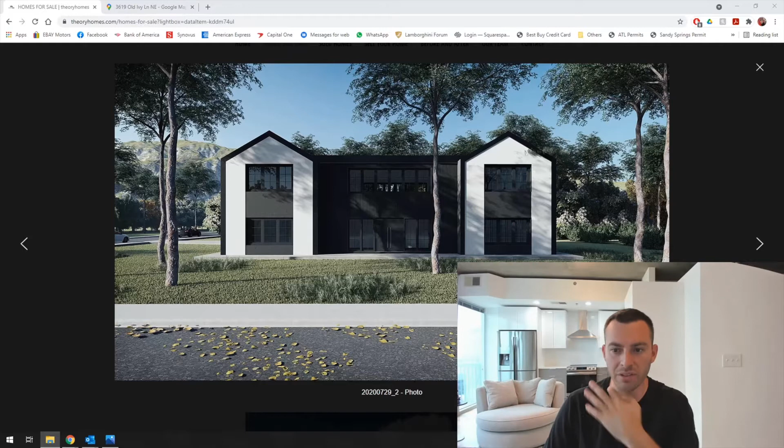So I didn't want it to be so pointy and peaky - I wanted to bring it down. We also have a height restriction on this property; it's part of an overlay called the Meadowcliff RIAD. You're only allowed to build 28 feet tall from the first floor finished elevation, the FFE, whereas everywhere else you're allowed to build 35 feet. So we had to bring it down shorter, and we had to play with the ceiling heights and overall height of the roofs. It's a bit of a challenge when you're doing a peaked roof house, but this is what we came up with. My designer, Christy Spearman, and I sat down and put together a general idea of what we wanted it to look like.

So she drew this up as a concept, and we had multiple versions. This is the first floor. We went back and forth on several versions, and you can see this is inverted from what the actual house is.

The garage is on the right and everything's flipped the other way on the left. This is another version we came up with. We didn't love this one so much because the proportions were a little wonky and it didn't fit. It has a second staircase to go up to a bonus room over the garage. This is another version of the second story, which isn't far off from what we actually built, but it's still the version with the staircase.

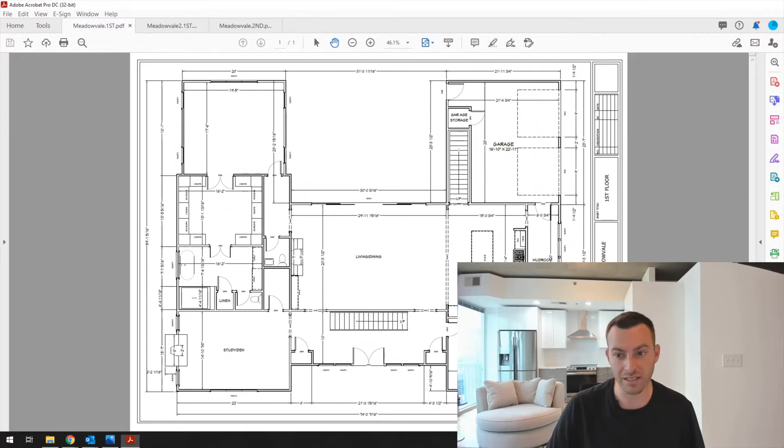So she and I went back and forth on different designs. We also did a 3-car garage version, which ended up not working out. We had a client who wanted to come in and do a 3-car garage, but I decided it was just too much and would delay our project too much. He wanted to change the roof and all this other stuff, and it would have added a lot of time to our build.

So we ended up with what you see here in this render. I'll scroll through so you can see where the floor plans ended up. These are on the website if you ever want to go peek at theoryhomes.com - we'll put a link right here. This is where it ended up.

You've got a nice 2-car garage on the left side at the back of the house. You walk into a mud area and then boom, it's kitchen, living, dining, one huge room. That whole back wall is an 18-foot accordion slider door, and above it is all 2-story. You can see on the right here, the open below - that's a 2-story ceiling. So this massive space is all wide open.

When you walk through the front door - going back to the front elevation picture here - all that glass sees straight through to the back of the house. We're going to have this really cool feature, a version we've done multiple times on other houses, a privacy screen that's also an architectural feature. Stay tuned to see that - it's going to be really cool, and really expensive, but it will suit the house and fit the price point of the home.

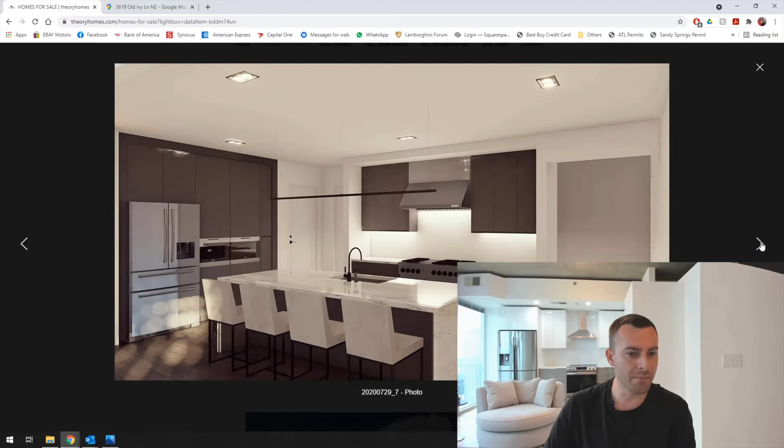So we came up with these renderings. We finally got the final plan set, and these are the renders our architect drew from the final plans. You can see it's got vaulted ceilings on all the bedrooms in the front and back - there's 2 in the front and 2 in the back on the 2nd story.

I'll pull up the plans so you guys can see what they actually look like. This is our final plan set, and these are super simple plans. You can see how it's rendered up there on top, and this bottom corner shows where it fits on the lot in the build site. I'll show you another plan in relation to that.

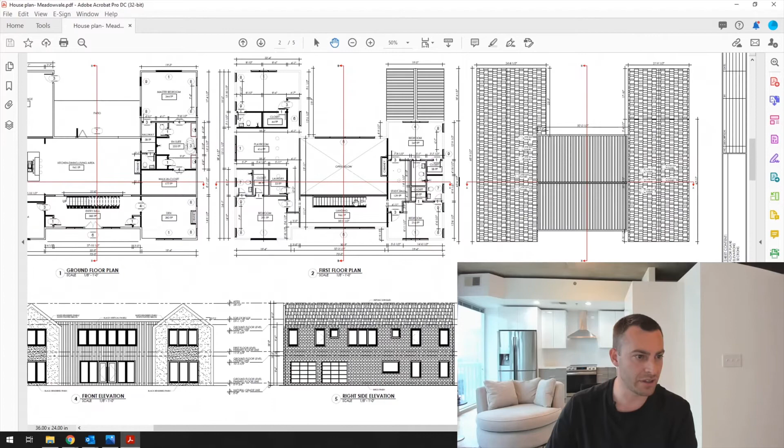These are our elevations - this is dimensioning out all of our existing ideas and putting them in scale so we can understand them. Then you've got all the windows laid out as well, plus electrical plans and other stuff like window schedules, garage doors, and stairs.

This literally all stemmed from this picture, which I completely hacked apart in Microsoft Paint like an absolute rookie. This is what Christy and I came up with on the design, and before you know it, you have renderings.

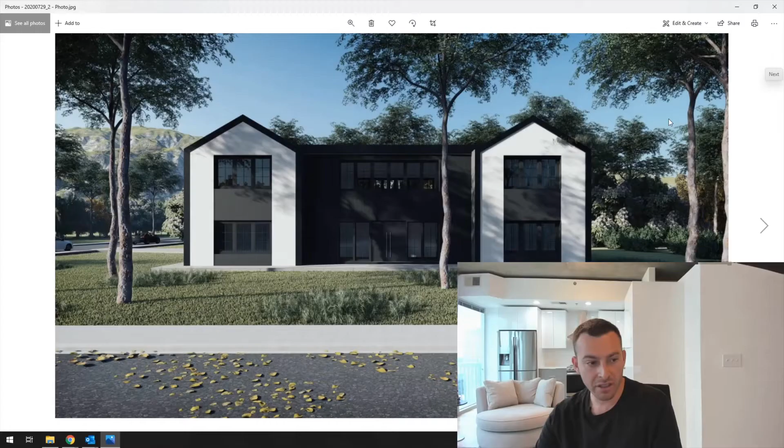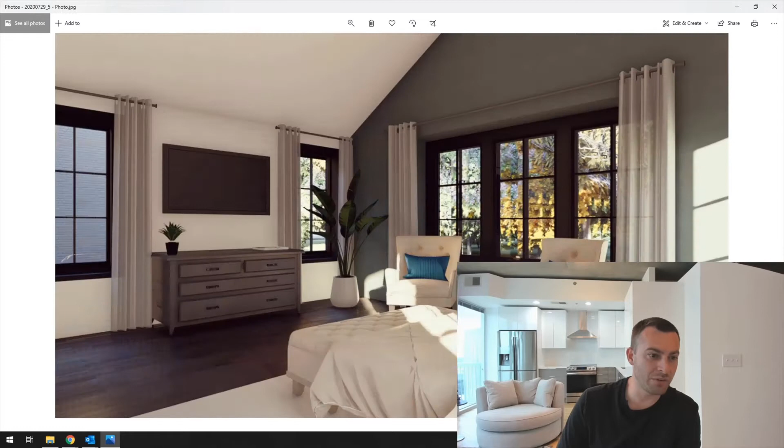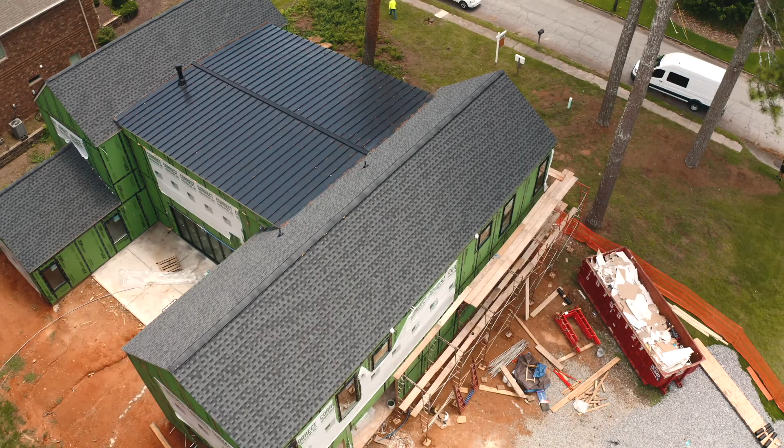Here's some shots of what the house looks like right now. We are in the sheetrock phase, and the floors are being installed. We had some delays on the windows, so we're waiting on these stinking windows to come in. The stucco guy's got 3/4 of the house stuccoed, and we have a bunch of windows still missing, so it's kind of a pain.

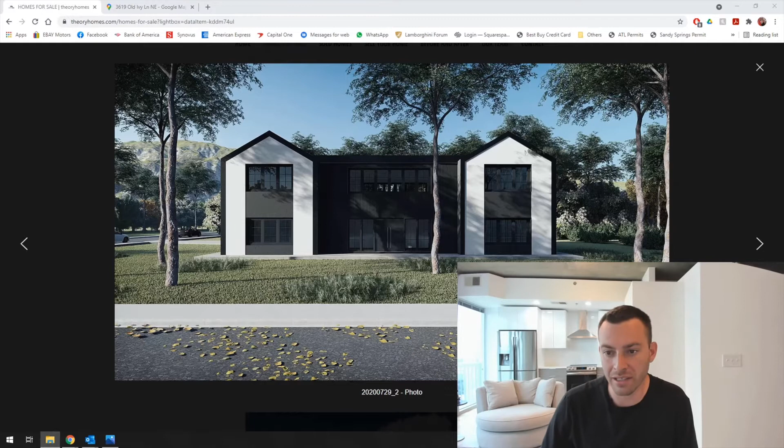But we're moving along. It's kind of fun to know that you can go from literally a picture that a friend sent me in Paint to a real house that's framed up and about halfway through construction, maybe even a little further along. This stuff is completely by inspiration—there's no rhyme or reason why we do the things we do, we just get inspired by things. And obviously my designer, Christy, is very creative, and she has a great way with flowing and creating floor plans for houses. So you have to factor all that in.

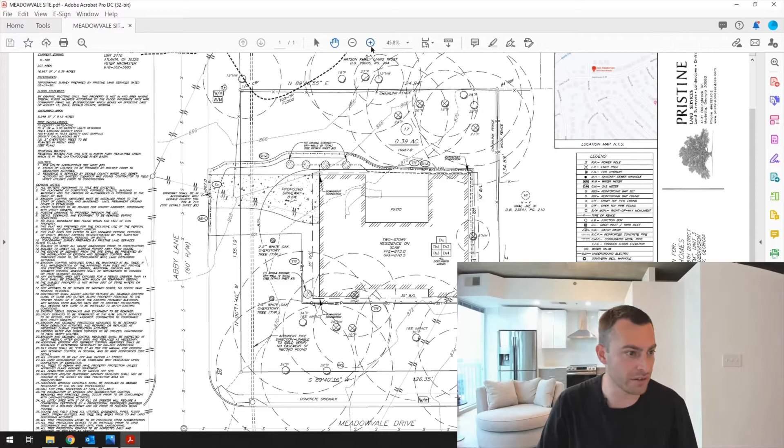And then I'll show you one other thing here. You have to do a site plan. This is the site plan, essentially like a survey, taking the existing property and placing the new house on the lot within the build line. So you can see here—let me zoom back out for you guys—this is the whole property. It's a big square almost, almost a square but it is a rectangle. But you can see it's got a really nice shape to it.

And so there's these things called setbacks. If you look right here, you can see the 10-foot BL. On the front, you see the 35-foot BL. And then over here on the left, the 35-foot BL. And on the back, it's kind of covered up by a bunch of stuff, but it says 40 feet BL. What that means is 40 feet from the back is your setback, 10 from the side, 35 from the front, and 35 from the other side.

This is a corner lot, so you end up actually having 2 front yards—2 front yard setbacks. Otherwise this one's 10 on the side, and this would also be 10 on the side. But because of the corner lot, with a street here, they make you set the house back the same as this side. So this dotted line you see right here underneath the hand goes all the way around the box. That is your build line, or what I like to call the buildable area.

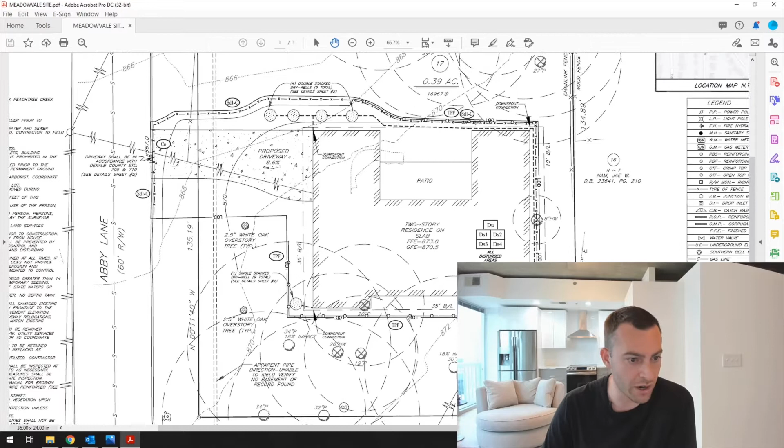So that square right there is where you're allowed to build house, structure, patio, whatever. Patios and detached structures are a different conversation and have rules about being built outside of the build line, but the main structure of the house and the garage have to fit in there, and you can see that we maxed it out. Literally every inch—well, there's a few feet on the left, a few feet on the right—but front to back, we've got this sucker maxed out to fit inside this build line. So that build line is the biggest driver dictating how much house you can build on that particular piece of property.

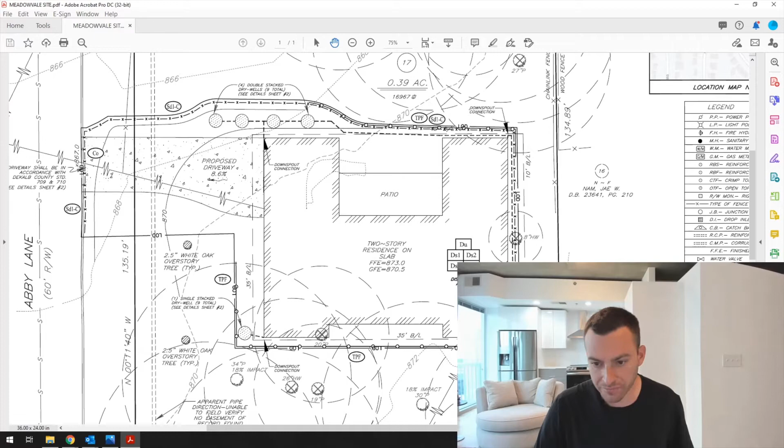And that's because of disputes—people didn't do surveys. Things were very different 40, 50 years ago, because a lot of these houses are from the 1940s, 50s, and later, so these things go way back. Obviously we didn't have any technology back then that allowed us to get this accurate on this kind of stuff—it was all done the old school way. So sometimes you had non-conforming lots, which means the house was in a position where it didn't conform with today's codes and standards, so you have to go with exceptions to make something work.

We've had houses before where they just poke a little corner outside of the build line. You have to get an administrative variance, a zoning variance, to build out past the build line by a couple feet. They'll usually give you 10% as a gimme, but anything over 10% has to go to full board review, and all kinds of people have to weigh in, including the neighbors. It's a nightmare. So the key is to stay inside the build box — you can go quick and don't have to deal with crazy variances that can take months. Stick inside the box and you'll be successful.

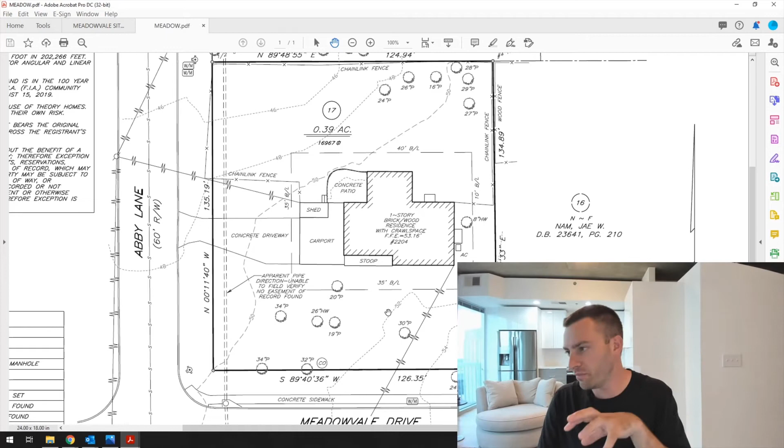Obviously, you have to work inside the topography of the land. If there's a lot of hills and valleys, you've got to work inside of that too — figuring out where to set the house elevation so the dirt and earth flow away from the house properly and there are no water issues. There's a lot of different factors you have to take into account when figuring out what kind of home to build on that particular piece of dirt.

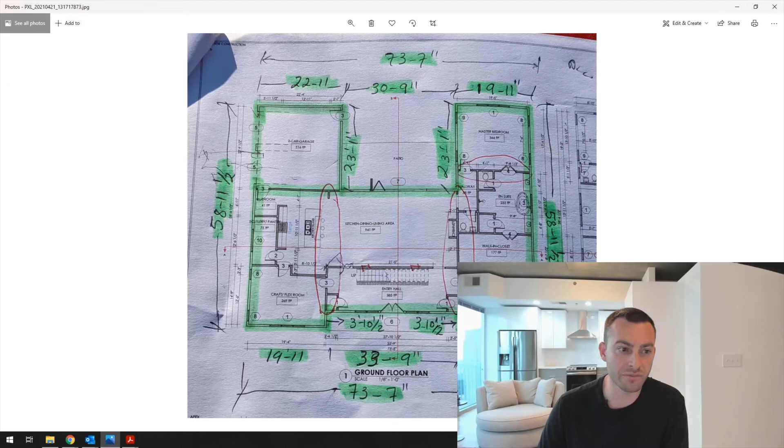So guys, you can see this is what I hand to my concrete guys because we're trying to figure out the foundations. These are some of the hand markings we have to figure out to get this exact, because we essentially go out on a blank piece of dirt and start building up forms, and we have to get them right on the money, accurate down to fractions of an inch, so that when we go to build the house, everything fits.

This is some plans I was given. Somebody wanted to rent the property for a movie shoot, and I was showing them the parts of the property they could use. But this is the structural plan, or the render, that comes from the designer's software when we're designing the house. I literally give them something like this in 2D dimensionally, and show them a render of what I want the elevation to be like, or I can just draw it — but we had renders at this point, and this is what they came up with.

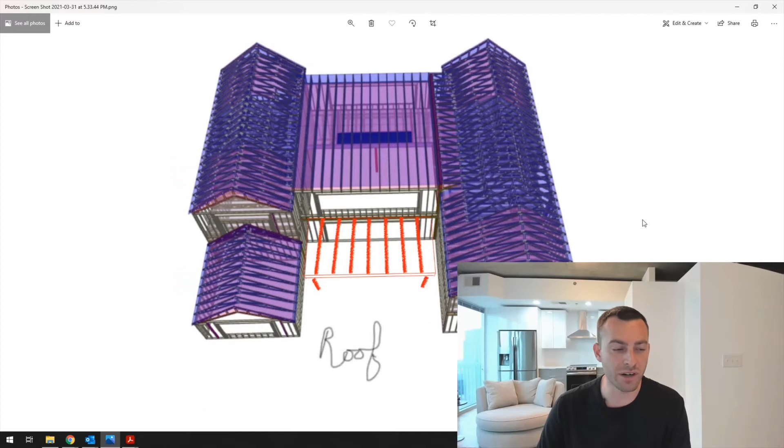So this is how the actual house is designed from a structural perspective. You can see these are all roof trusses up here, and because of this shape of the house and the asymmetry on the backside, we had this little jut out which was a bit of a challenge, but they got it designed out. This center section looks flat, but it actually has a small slope to it. In the back, you can see all these vaulted ceilings — these trusses are all designed to give you that vaulted ceiling, so there's no cross section here. This is just the back wall, not shown here; they closed that up with stick framing, which is just framing put together on site.

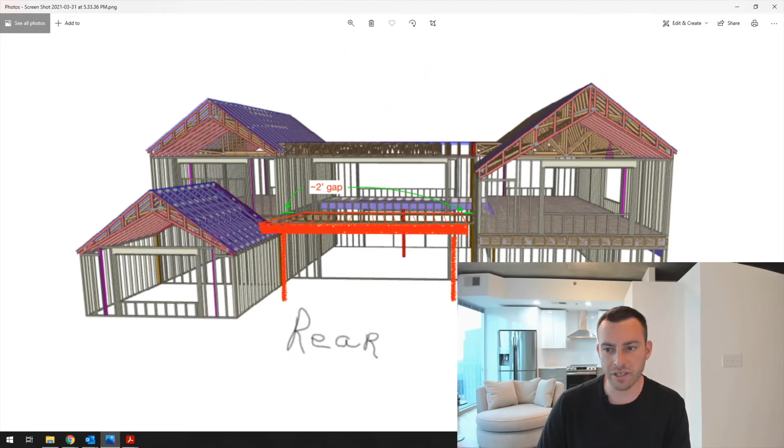This is a cool concept the designers put together. This is what a floor truss layout would look like at the second story floor. Because this house is a slab house, you don't have a floor system for the main level since it's all concrete. So what you're looking at here is the second story floor, or the ceiling of the first story, and these are all the trusses.

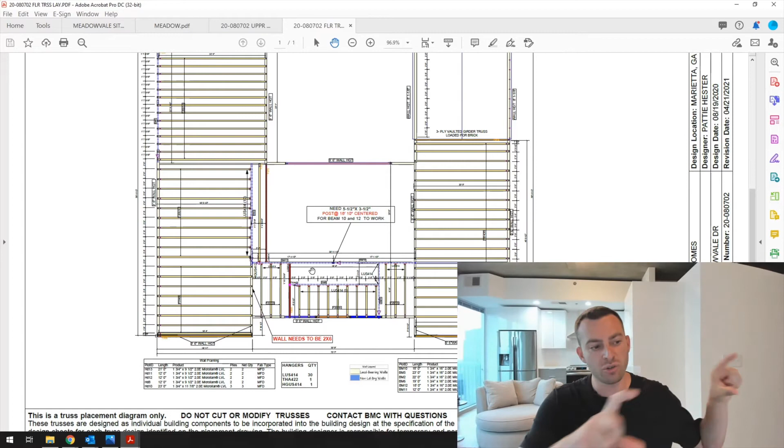They're all numbered and tagged, and these big blue dotted lines are heavy LVL beams — you'll see that in some of our videos, we'll put a clip here walking through. You can see the huge beam that goes right across the staircase and supports this entire floor system. All of this is designed in their software, which handles the engineering behind floor loads, roof loads, wind loads, rain loads, dead load, live load, people, furniture, flooring, materials, tile — all factored in to make a strong home.

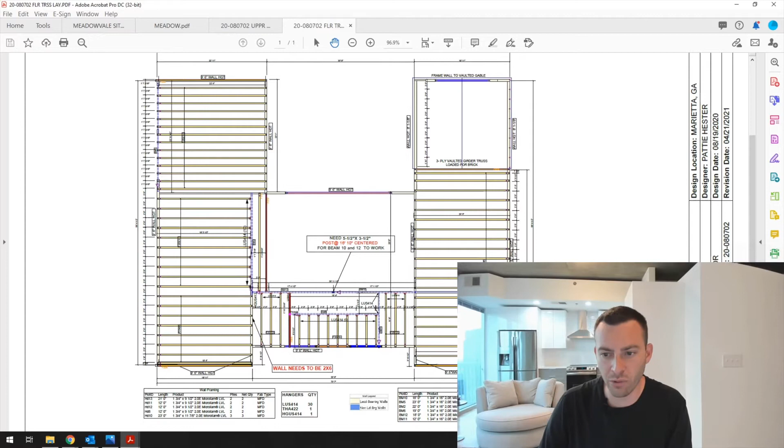So that's the floor system. These are the profiles — you can see this is a 1 foot 4 inch, so it's a 16-inch truss, and these are open web trusses, so it looks like a roof truss. They're all 2x4s built together. In this central square section, there's a great opportunity to run HVAC ducts, mechanicals, and plumbing through all of these.

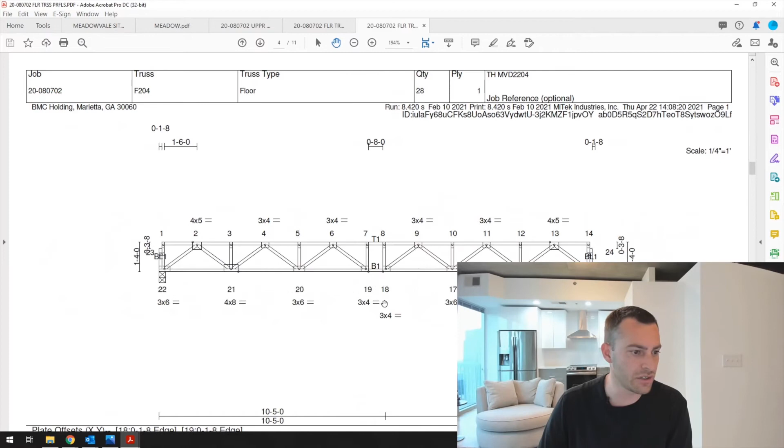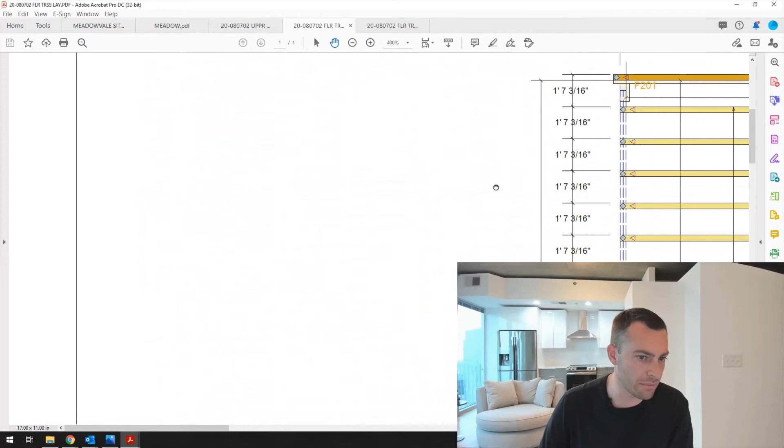So you can go through and see all these different truss profiles. Each one of these are tagged. If I zoom in here, for example, these trusses are F201s. And over here, these are F209s. If I go back to this page, all of those are F202s.

These things come all tagged in the field, so it's literally like putting a puzzle together when you get out there. But it's super simple because when they give you these plans, or they ship the truss packages to the site, the trusses all come completely ready to go.

In order of when you will need them to build it in a logical fashion. So it's pretty cool, this is the roof truss plan. It looks very similar to the floor truss plan. Obviously they're all laid out. You've got HVAC platforms, areas where you can do pull down stairs, HVAC platform over here, so you can feed the HVAC into the house from both sides.

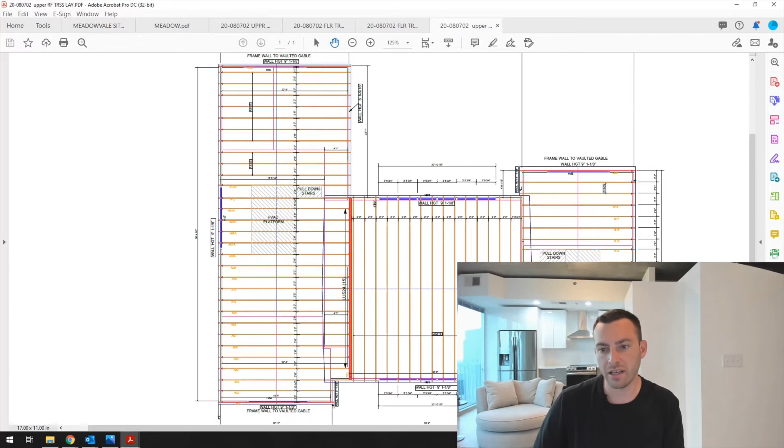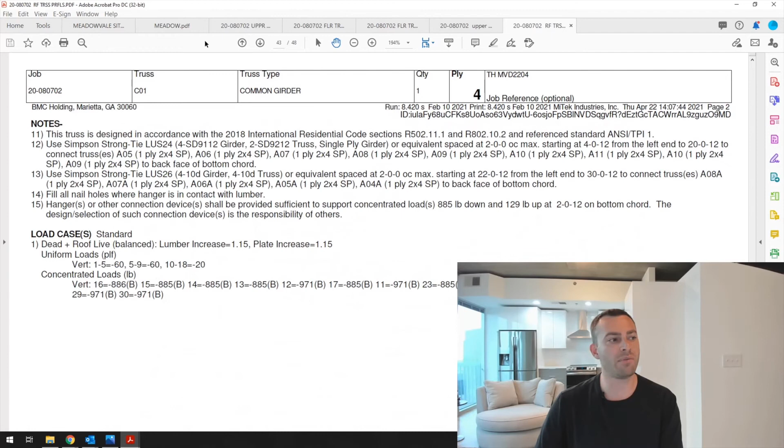Again, these are your roof truss profiles where you can see the number, the name, the dimension, the shape. That one right there has a board for your HVAC platform, and you can stand up right here in the attic to service and install your HVAC. So all this stuff is factored in way ahead of time, right on the design, so you can understand where everything needs to go. Think about placements, HVAC, elevations.

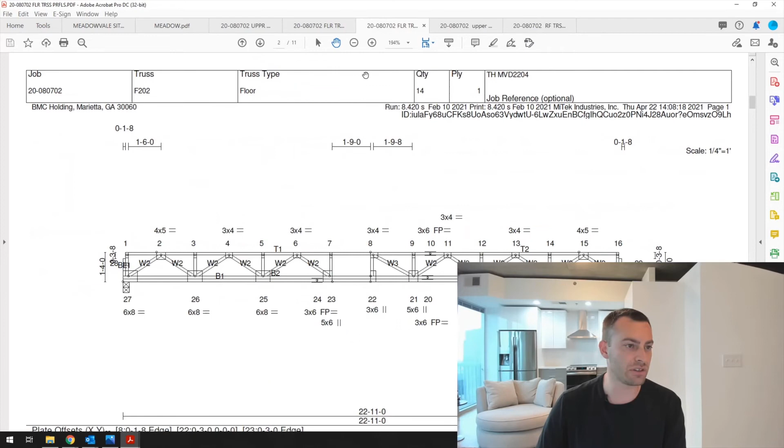It literally, I just go out to the site, pour a slab, have a bunch of framing delivered, they deliver these packages, I hand these plans to my framer and say, here you go. And these framers know how to do this stuff. They know how to read these plans, they take them and they build it. They have some questions and we have to figure it out on the site.

That's when these renders really come in handy, because it helps you wrap your brain around how the pieces come together. If you have beams overlapping each other, understanding those elevations, your designers can give you these renders so you can use them as visuals because it really helps out. We have another house where we had multiple beams landing on top of each other, and when you're looking at it in 2D, it just doesn't make a lot of sense. So when you 3D it out, you can really get an understanding on how to lay them up.

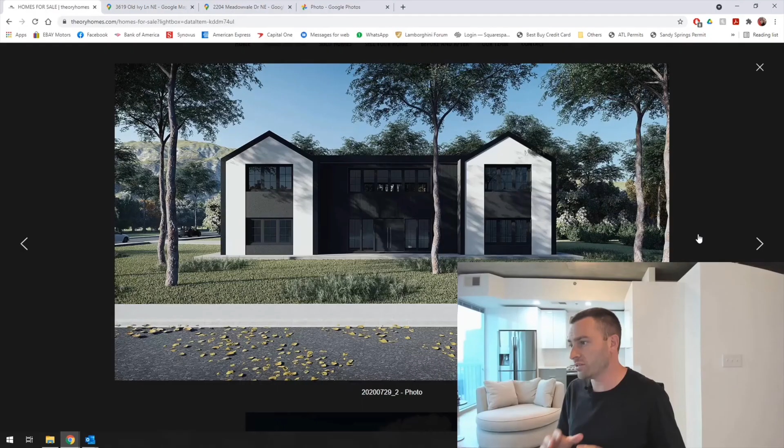For people getting into flipping or into the building industry, I always say cut your teeth on something like this. Over here I'll show you one of our pop-the-top projects—actually let me scroll back to the beginning. These original ranches right here are some of the first houses we cut our teeth on, these little tiny things, and then we got into the bigger renos.